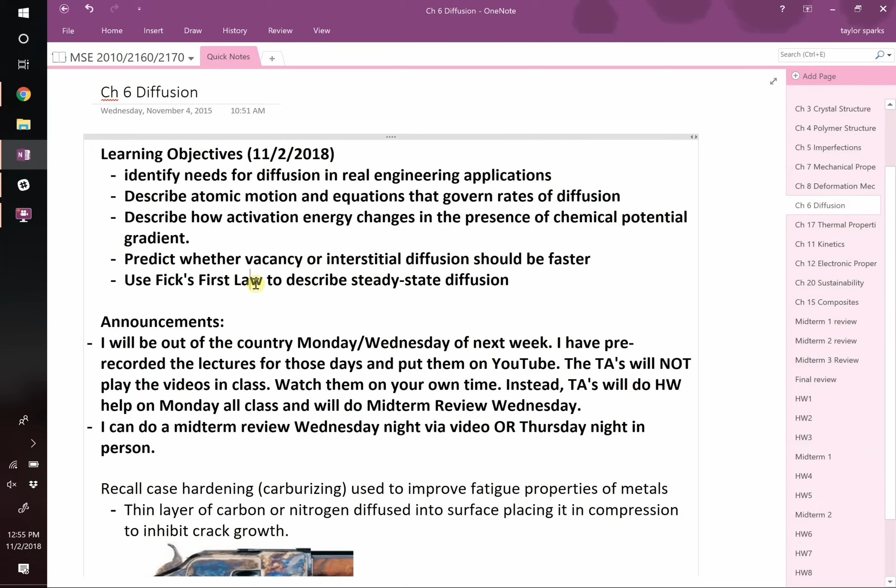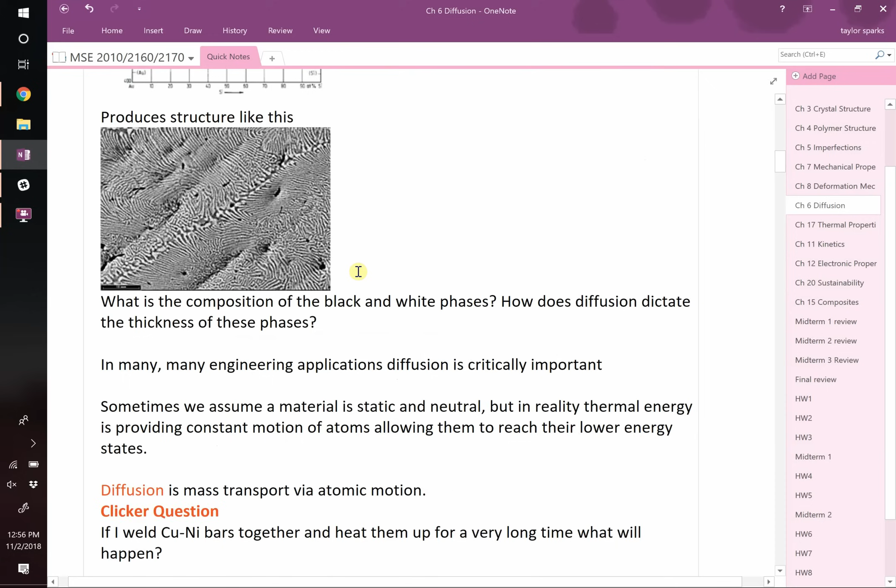Couple things today. We're going to do the first half of chapter 6, but I do have some announcements. I'm going to be out of the country next week on Monday and Wednesday. So I have pre-recorded the lectures for those days. So the latter half of Diffusion, halfway down, I've already recorded it and notes are here. And they're already all messed up because I've added space. So I'm going to finish the lecture today and put it online. And then you can watch the other 2 lectures anytime you'd like.

Instead of having them in class, which we've done in the past, you can come on Monday and Wednesday just for homework help and midterm review. Make sure to bring your homework in on Wednesday, right? You still do have to turn in your homework on Wednesday, but I don't care if you stay the whole class. There won't be clicker questions. Instead, the TAs are just going to do homework help all Monday and midterm review all Wednesday, okay? So watch the videos anytime you like.

That said, I get back Wednesday night, and the test is Friday, which doesn't give me a bunch of time for a midterm review, so we can do one of 2 options. I can do the midterm review Wednesday night, but I won't be able to do it in person. I'll have to just make a video and do my best to go over the topics. That's one option. The other option is I come in on Thursday night and I can actually do face-to-face questions if you have specific ones. I guess a third option would be send me the questions ahead of time that you have, and I'll cover them on the Wednesday night thing. The benefit to the Wednesday night is I'll post it 2 days in advance of the test. Thursday doesn't give you a lot of time because the test is the next day.

So we'll do a quick poll. Would you prefer A or B? A would be an in-person review on Thursday night. B would be a video review of just all the study guide topics, which I'll have posted by Sunday. But that's going to be on Wednesday night, 2 nights before. So go ahead, get your answers in. There's no correct. It's just participation on this.

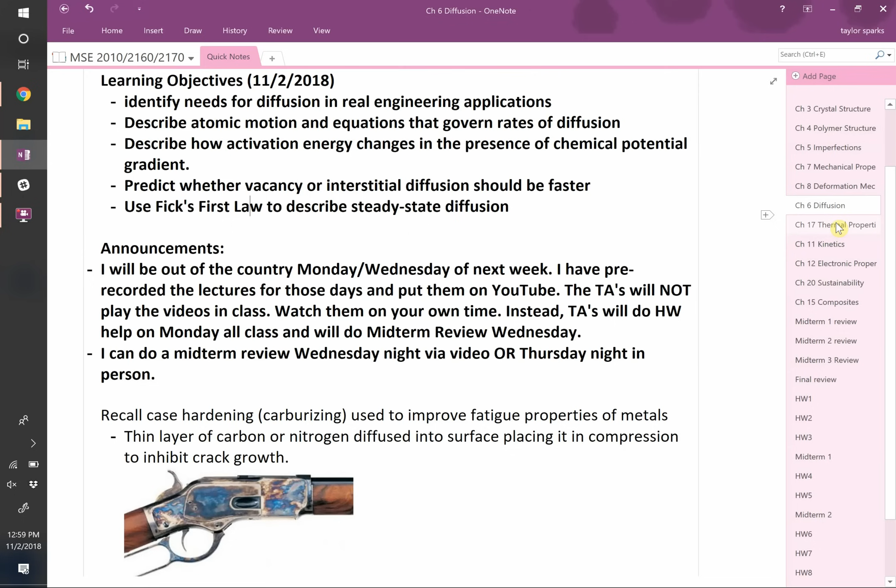And I've said it before, but it bears repeating. Every midterm is built out of a homework question that you've seen. So the best thing to study is previous homeworks, right? Look up the notes from class for sure, but the best thing to study is the previous homework that tags along to that question. Okay. That said, so our learning objectives, we will say a few words about the last chapter that we didn't get to.

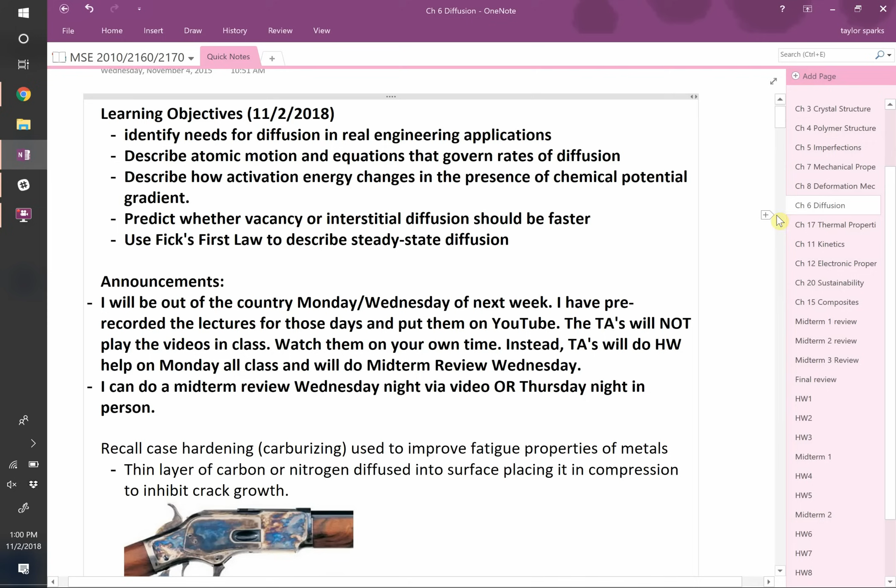And in chapter 6, we're going to start talking about why on earth we care about diffusion. What is diffusion? We're going to describe how atomic motion works and how this governs the rate of atoms moving through a lattice. We're going to introduce the concept of an activation energy and a chemical potential and how that leads as driving forces and inhibitors for motion. And by the end of class, we're going to get to Fick's first law for mass transport.

But before we do chapter 6, let's just do a quick recap of the very last things in chapter 8. The very last thing that we didn't quite have time to get to was stress relaxation in polymers. We showed you it briefly in a previous chapter, but it said that the stress that you apply on a polymer is going to slowly relax, and that's because the polymer chains can slide past one another. So the stress at any given time is right there.

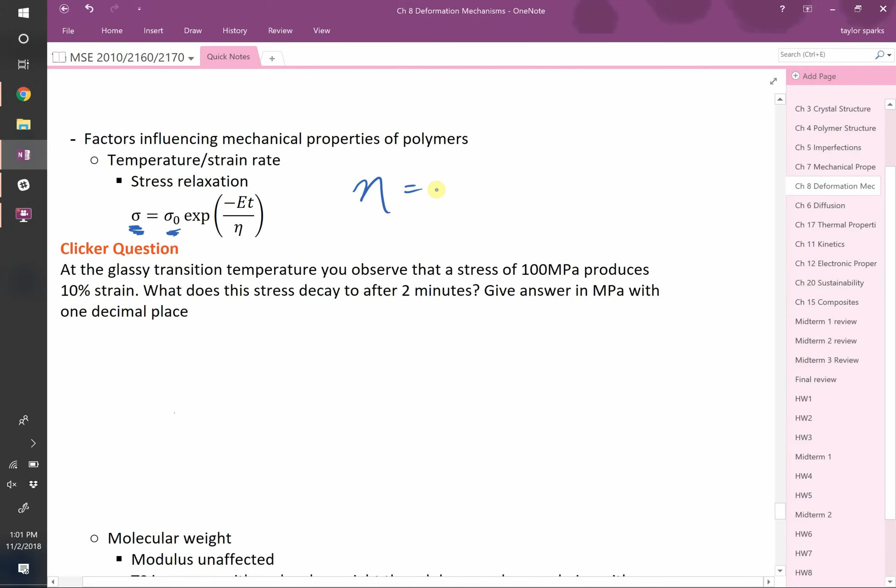That's going to be a function of your initial stress, sigma naught, multiplied by the exponential of negative modulus, that's your stiffness, Young's modulus, times time divided by viscosity. Okay? So I think there's a question on the homework where you had to relate viscosity to the viscosity at the glassy transition temperature, 10 to the 12 Pascal seconds. And we found a way to modify it at different temperatures.

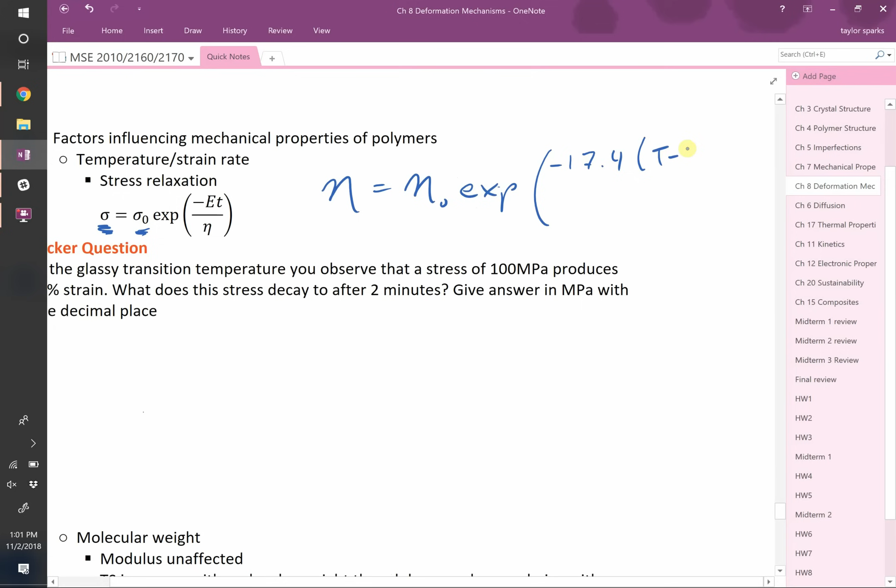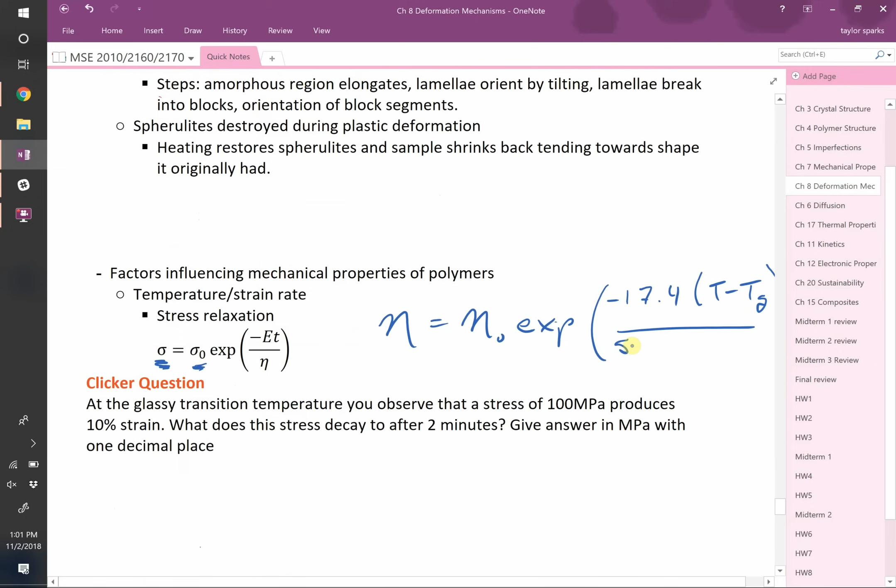And it was something like negative 17.4 times temperature minus the glassy transition temperature. And then the bottom was, I think, 51.6. Right here. 51.6 plus T minus TG. So if you did need to know what the viscosity was at a different temperature, this would be the equation that you could use as a first approximation.

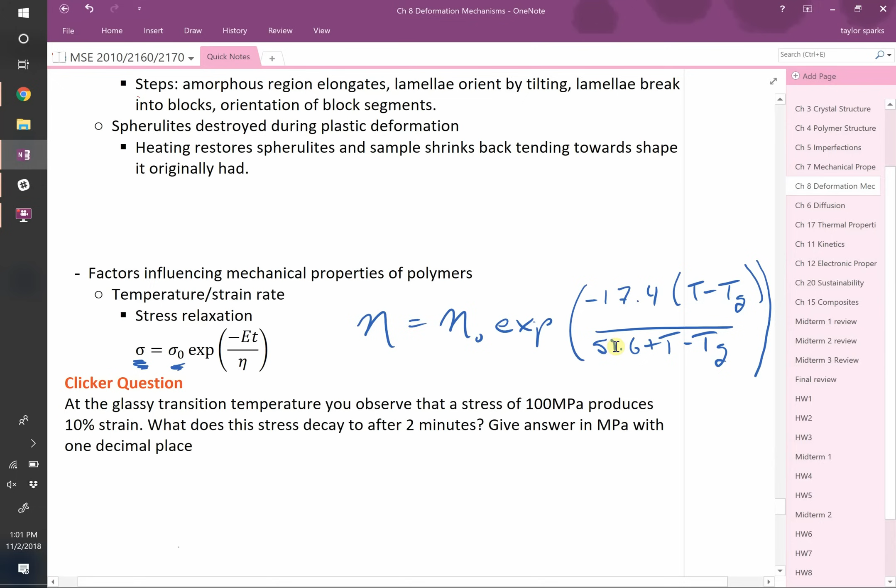The problem with this, what's called the WLF equation for viscosity, is that you need to know what these constants are and they're material dependent. So if you just use 17.4 and 51.6 for all the materials, it's not going to get it right all the time. It's just an approximation. Okay? Let's do a quick calculation though with this.

Let's assume the following. At the glassy transition temperature, you observe a stress of 100 megapascals produces 10% strain. What does this stress decay to after 2 minutes? Give the answer in megapascals with 1 decimal place. And if you don't know where to start or if you want a hand, we've got a couple TAs that can help out. Just raise your hand.

Sorry, scoot past you. Okay, how can I help? We don't have the glassy temperature. Well, you're told that you're at the glassy transition temperature. So that tells you what the viscosity is, right? Oh, it's 10 to the 12. Yeah, 10 to the 12 Pascal seconds. Other questions I can answer? Well, if you notice that viscosity is in Pascal seconds, T has to be in seconds to cancel out. So if you keep your units, you'll get it right eventually, but just put it in seconds.

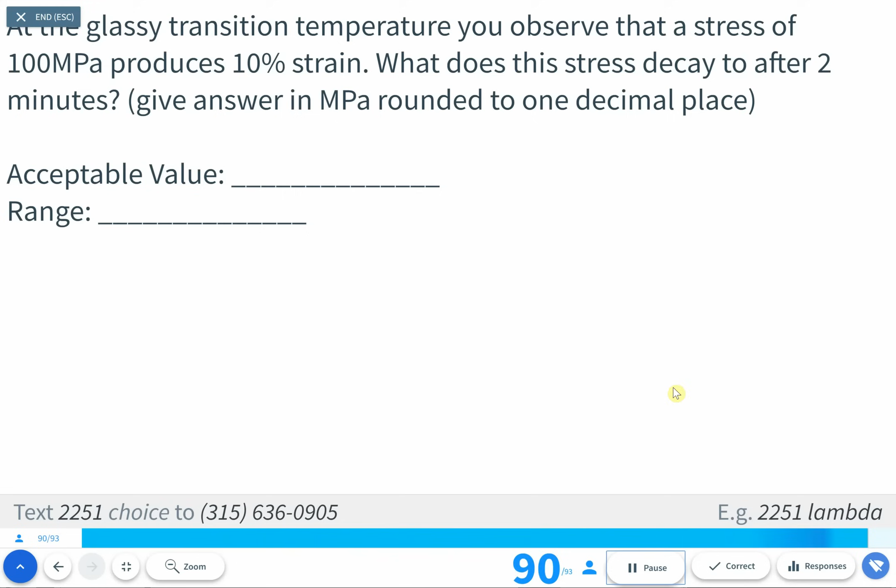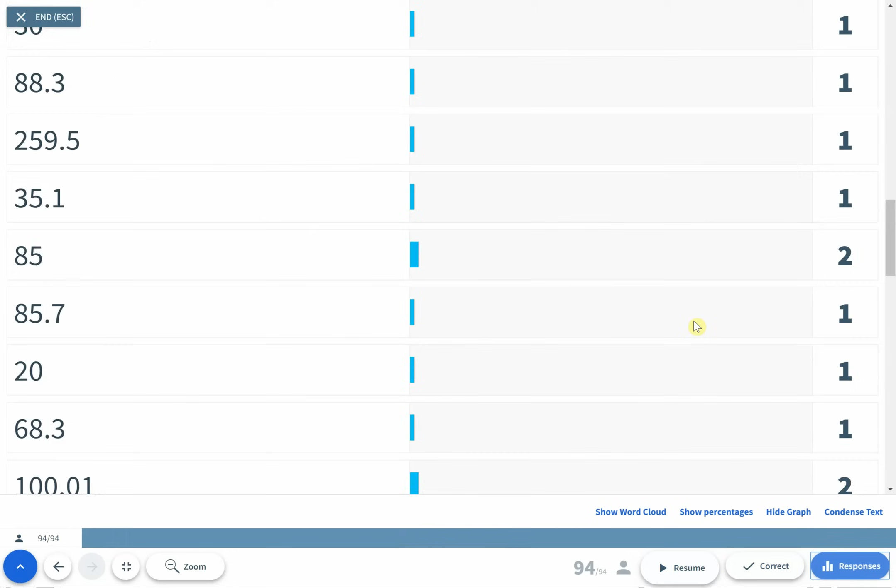So to do this question, we need modulus. So remember Hooke's law to get modulus. If we need to solve for big E, it's just going to be the stress divided by that strain. The stress was given at 10% strain, so turn that into not a percent when you solve for the modulus, right? That is in megapascals, but viscosity is reported in Pascal seconds. So to make our life easier, let's just convert it to pascals right now. So that's going to be 100 times 10 to the 6th pascals.

Multiply that by time, which is 2 minutes. Let's put that in seconds because viscosity is in Pascal seconds. So that's going to be 120 seconds. And divide this by 10 to the 12th Pascal seconds. We stated that this happened at the glassy transition temperature, and by definition, the glassy transition temperature is when the viscosity is 10 to the 12th Pascal seconds. So that's something you want to put on your equation sheet. I didn't bring my calculator. Somebody punch this in for us and see what you get.

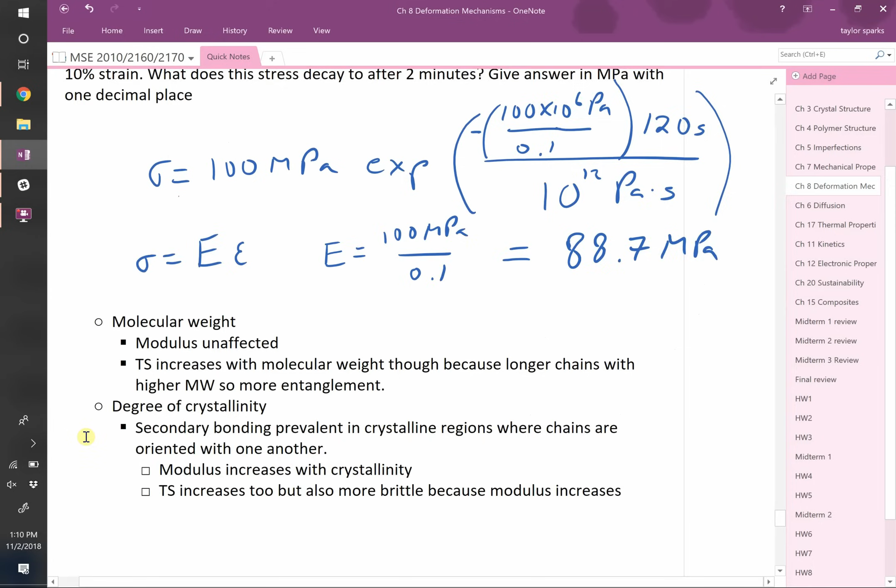All right, let's say a few more things about molecular weight. As you increase the molecular weight, the modulus doesn't change that much, but the tensile strength does change. As you go towards longer and longer molecular weight chains, there's more and more overlap, so the bonding gets stronger, which makes sense why the tensile strength increases.

Degree of crystallinity, let's see, this changes. Secondary bonding is prevalent in crystalline regions where the chains are oriented with one another. So if you have a more crystalline polymer, then you have more fraction that's bonded together, even with van der Waals bonding. So that will increase your modulus, okay? Modulus will increase with crystallinity, and obviously tensile strength will as well. Okay, those are the last things on Chapter 8.

Any last questions on deformation mechanisms, on mechanical properties? Because I think we're going to move on to diffusion now. Yeah, Becca? Oh, thank you. Okay. The units in the exponential cancel out, and the unit in the pre-exponential was megapascals, so it is megapascals. Good thing to ask about, though.

All right, so let's move on to Chapter 6, which is diffusion. Okay? So diffusion is another important engineering process. You can't help but use it. We use it all the time. So this gun up there that has that sort of patina look to it on that casing, that's something called case hardening. They do it intentionally. And all they do is you start out with the steel, and then you expose it to either nitrogen or carbon. And over a while, that nitrogen or carbon will diffuse into the steel.

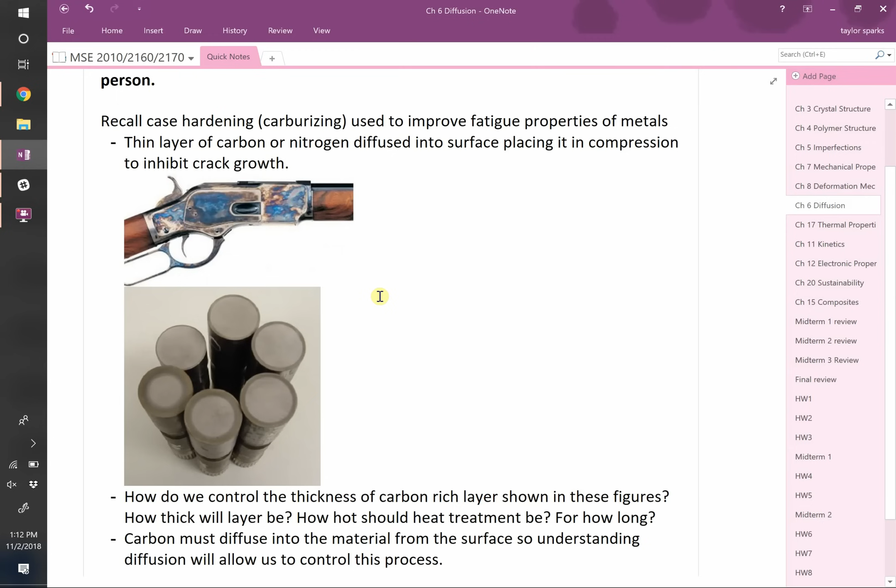And the reason that they do that is by putting carbon and nitrogen into the lattice, you start to fill what are called the interstitial sites. If you remember back to crystal structure, interstitial sites are the ones between the atoms. And so by putting atoms in those spots, you make it harder for slip of dislocations. Therefore, you made it harder. And you made it harder right at the surface, so you made it less prone to be scratched. So it's a way to not only make it look kind of nice, but you prevent scratching when you do case hardening. And they do this in all sorts of stuff.

Take these different materials here. I don't know what exactly these are, but they're adding carbon to the outside. And as they change the conditions of the heat treatment, the carbon is changing how far it can travel into the material, right? You can see that just by the color. You got this thick ring here, but in the other ones it's thinner and thinner. So an understanding of diffusion will help us understand how far into materials diffusion will occur, right?

So we've got a cool demo for this. It's the most dangerous one to date, and I need a volunteer. But like, you have to be really sure. Are you sure, Ashton? Okay, come on down. Okay. Ashton, I hope you don't mind smelling like Dark Temptation Axe. Because you're about to. But for science. He's risking life and limb for science, for all of us to learn. So, I'm going to go ahead and spray him with this Dark Temptation Axe body spray. And when you smell it, I'd like you to raise your hand.

No one smells it? You guys don't smell it yet? Wait for it. It's coming. Oh, gosh. I have to get on a plane later today. I'm going to smell so dark and tempting. Hands up. You smell it? We're like running out of juice over here. Holy crap. How do you not smell that? You're a good sport, Ashton. Okay. This may be the longest I've ever done this demo. Alright, we're going to call it.

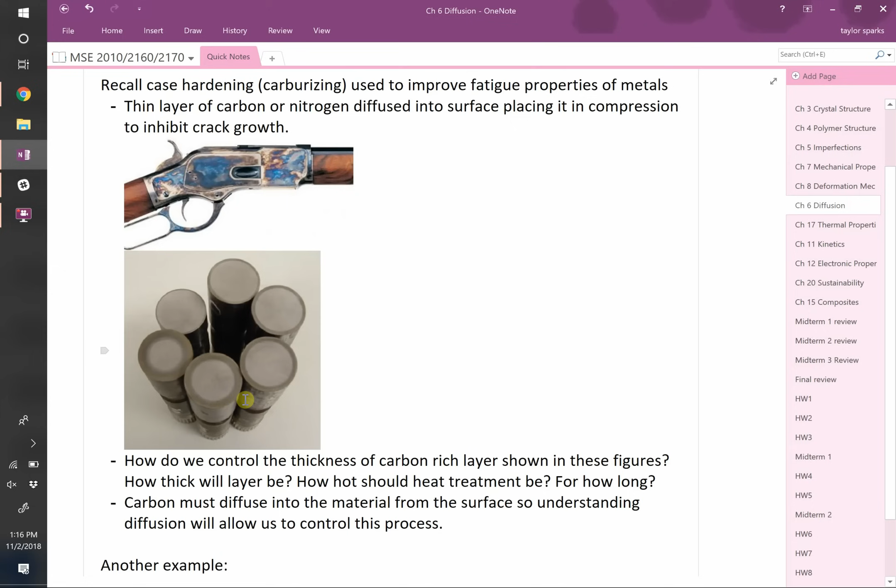It's similar in that if you have a concentrated region of a type of molecule over here, that molecule is going to travel down the concentration gradient. That's why, if you saw the hands in the room, we smelt it really quickly, because we were doused in it. Ashton's really doused in it, right? And it sort of spread its way through the room, okay?

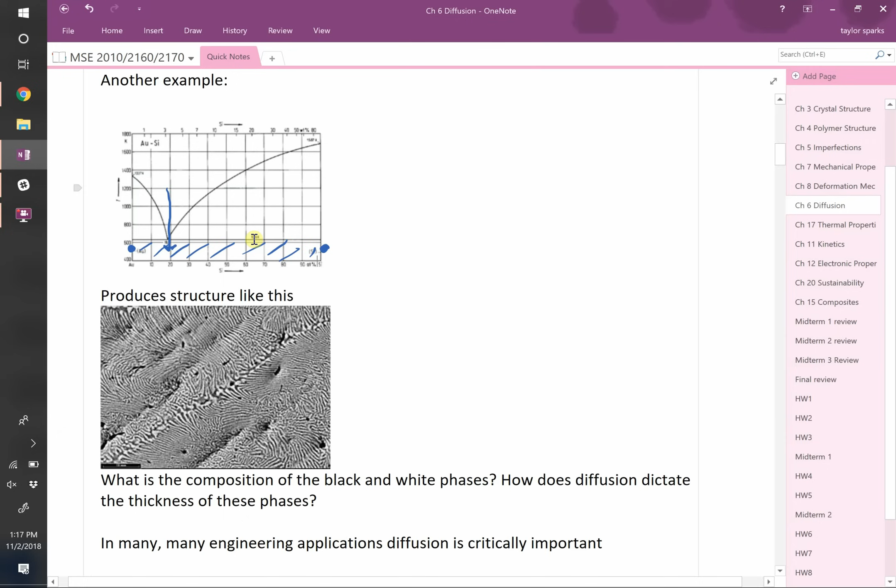And that's why you see these tiger stripes. These represent phase boundaries. These are grain boundaries, right? Grain boundaries cost energy. The system would like to get rid of these, but it just can't do it because diffusion is too slow. Moving all these atoms to get a big black glob and a big white glob would just take more mobility than these atoms have. Okay?

So when we start talking about diffusion, one of the first things we can do is build what's called a diffusion couple, right? A diffusion couple means, let's say I take a copper bar and a nickel bar. So I've got copper and I've got nickel. And I weld them together, I bond them, I press them together. And then I heat treat them. What will happen when I heat treat them, after a very long time? This is our next clicker question, I think.

Okay, if I weld a copper and a nickel bar together, and I heat them up for an infinitely long time, what will happen? A, nothing. B, you get a mixing of the atoms, but you end up with a copper-rich and a nickel-rich region. Or C, a completely homogeneous mixture. And we've already said that things go down the concentration gradient, so it would make sense that there's some mixing, but the real question is B versus C, right? Do you always have a nickel-rich and a copper-rich region, or is it completely mixed? Okay, get your answers in.

Yeah, it's so strong. Easily the longest we've ever done that demo. I need my wife to bring me another shirt for the airplane. Everything okay?

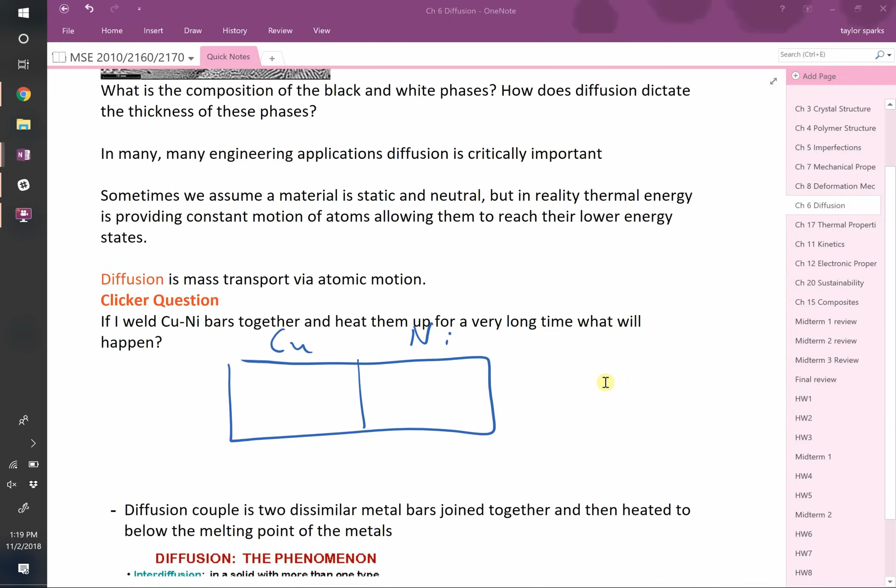What about in times less than infinity? In times less than infinity, you're going to see a concentration profile, right? So if we were to draw the concentration of copper, after a while it might look something like this, whereas the concentration of nickel might look like this. They do not have to be symmetrical. That's an important point. In fact, the only time that they are symmetrical is when the diffusion rate, or what we're going to get to, called the diffusion coefficient, is equal for each species in each host.

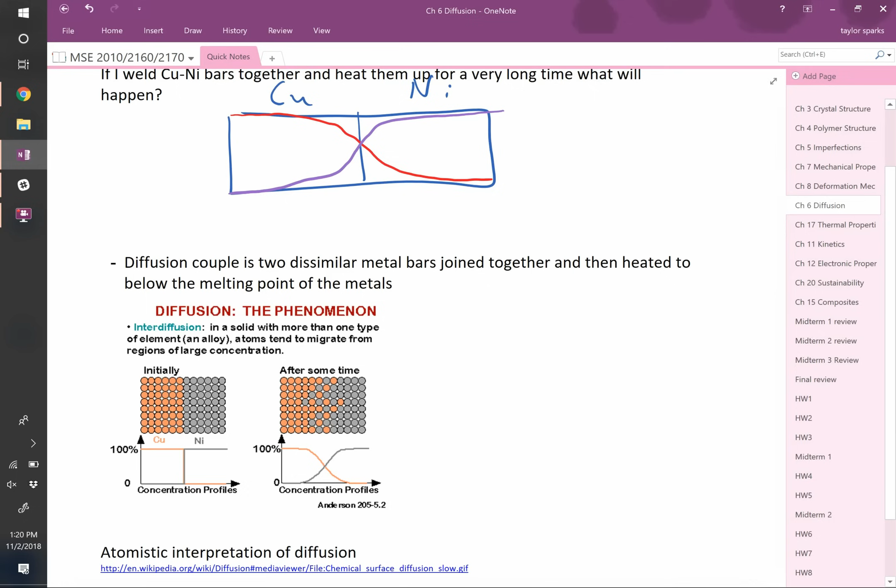So the species is the atom that's diffusing, and the host is the lattice it's diffusing into. If those are the same for copper into nickel as it is for nickel into copper, then you'll get a symmetric profile, but it doesn't have to be that way.

Okay? So here's an interesting way to think about diffusion. Somebody made a nice cartoon for it. There it is. So here they're showing atoms at the interstitial positions of the blue lattice. And then they give these things atomic vibrations, right? And you see that on average, these white atoms are starting to spread out.

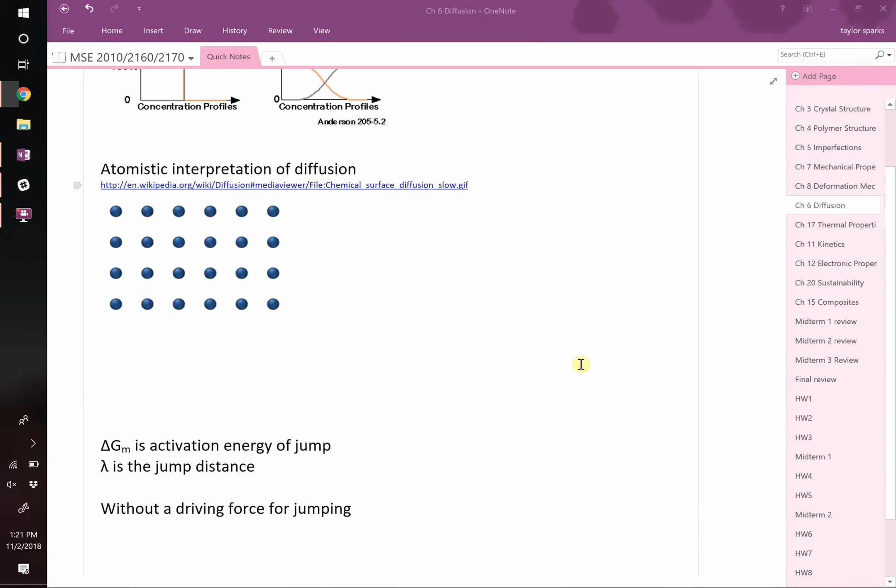There was a whole bunch of empty space on the right-hand side, and they were concentrated on the left-hand side. So it was a higher concentration, lower concentration. And if these things move randomly, they can't move into a spot that's already occupied, so their average flux is going to be to the right. A flux simply means that there's an amount of something moving per area per time. Okay? So that's sort of an atomistic interpretation of diffusion.

We can actually turn that into a nice cartoon, right? So let's go ahead and draw an axis here. We're going to draw energy versus distance in our lattice. So that's in the x direction. We're going to draw energy up here. So when an atom starts out, let's say that we want to hop from one spot to another. Typically when it's in its spot where it started out, that's a spot that's lower energy. And as it hops to another spot, it has to overcome an energy barrier, right?

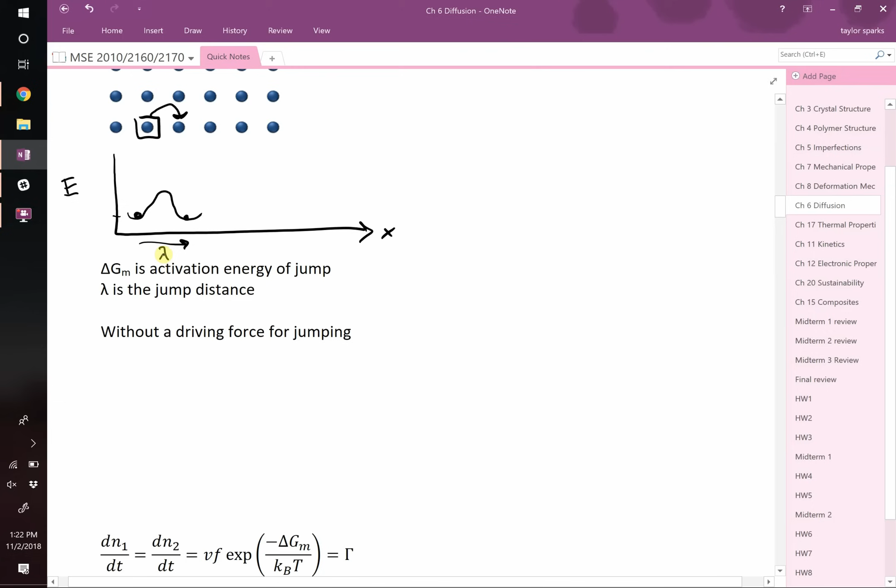So the plot might look something like this. This is where the atom started out at some lower energy. And when it moves a distance over to this point, we're going to call that distance lambda. That's the distance between hopping sites. It typically has to overcome some energy barrier. We're going to call it the activation energy, delta G M. That's an activation energy from going from one site to the other.

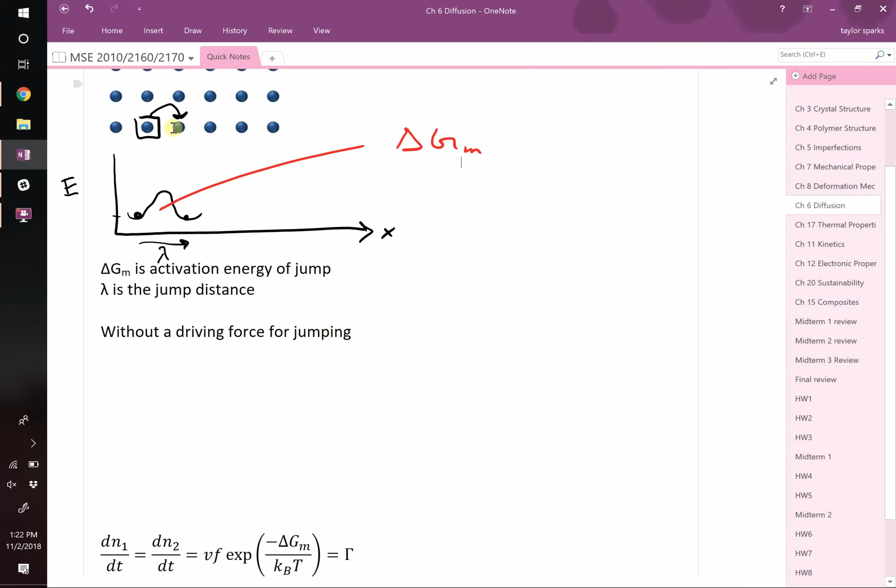And maybe the right way to think of it is that if you're an atom that's going to move over here, you have to break bonds, you have to squeeze other atoms out of the way. So it makes sense that in that transition period, as you're moving to an empty site, it's going to cost a little bit of energy. But once you get there, you're going to gain some energy because you're going to form new bonds. The strained atoms go back to normal. So that's our activation energy for jumping, and that's our jump distance.

Let's modify this now. Let's assume that you can hop in both directions. So we're going to draw our axes. So you've got energy. This goes from site 1 to site 2, and your curve looks like this. Okay? So we could figure out the rate of atoms moving from the left to the right, from 1 to 2. We could also calculate the rate from going 2 to 1.

So we could calculate dN1/dt. N is the concentration, so that's the change in concentration with respect to time on site 1. And we could figure out the change in concentration of site 2 with respect to time. So we have concentration N1 over here, concentration N2 over there. We have our same activation energy as before.

And in this case, with no driving force, the rate of change of atoms from site 1 to site 2 versus site 2 to site 1 is going to be the same. They both overcome the same activation energy. So we're going to say that dN1/dt equals dN2/dt, and that equals nu times f. Nu is the attempt frequency. So if an atom's vibrating, each time it's vibrating, that's an attempt. One of those times it might actually jump over to the other side. F is the fraction of atoms in the correct configuration.

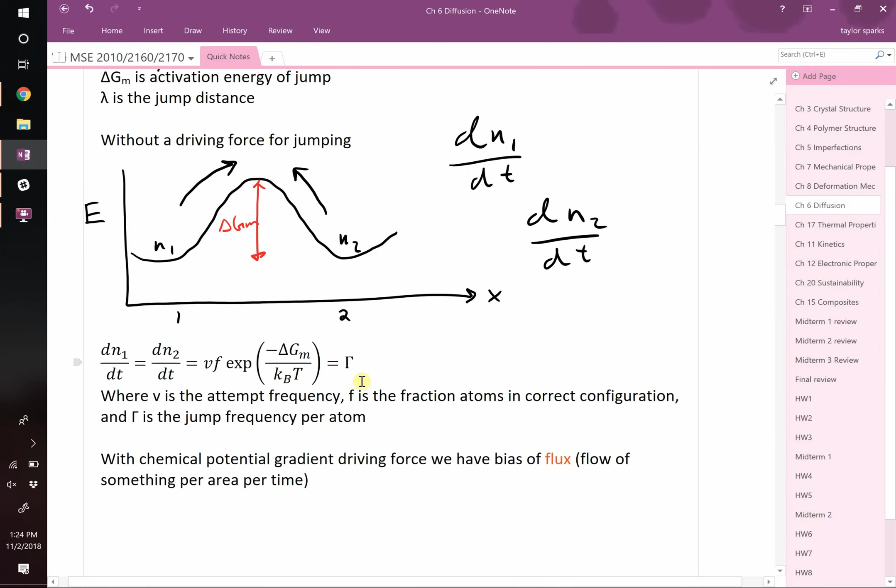What do I mean by that? If we go back to this drawing, for this white atom to keep on hopping that way, there has to be an empty spot next to it. Like, this guy can't jump up because there was an atom above him. So that's not right.

Also, it takes into account what's the direction, because we define the direction from 1 to 2. So only one of its 6 directions it can jump is in the right direction. That makes sense? So it's just a fraction that accounts for geometry. Then you've got an exponential of your activation energy. This is a thermally activated process, so you have thermal energy in the bottom. We're going to call that whole thing gamma.

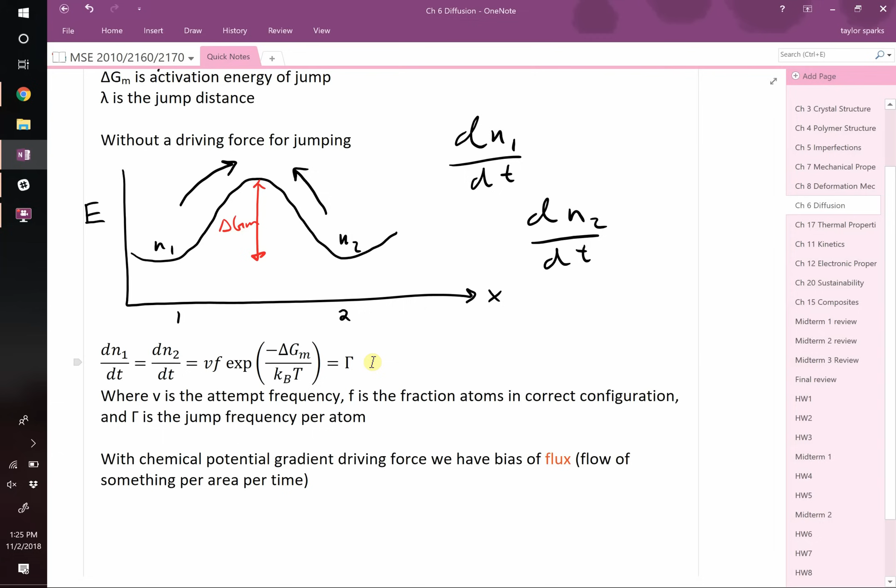Okay? This is just some background for diffusion. We use simpler equations in this chapter, so don't sweat these equations I'm going through right now. This is just background. Okay? We're going to modify this now. We said when there's no diffusion gradient that the rate of atoms hopping from one site to the other is the same as them hopping right back. So there's no net flux. There's no movement through some area per unit time.

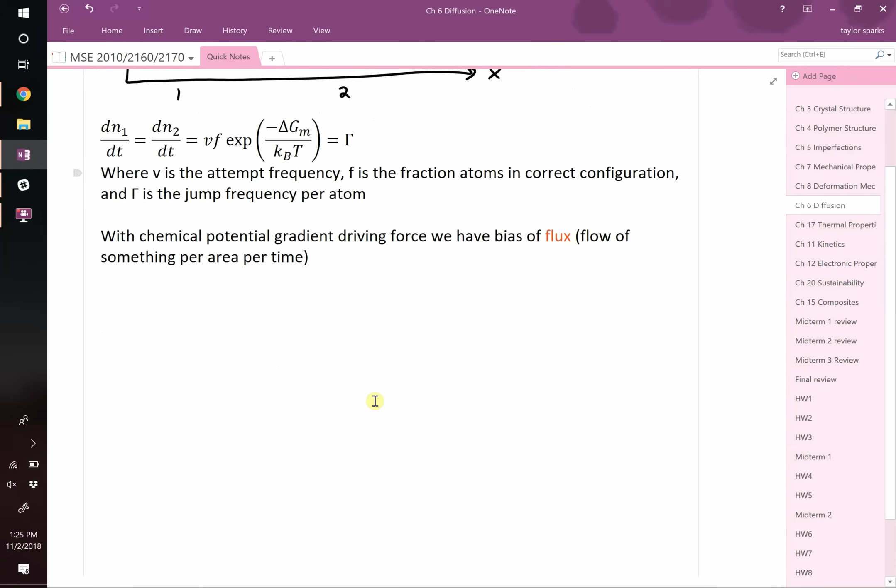But if we apply a gradient in the concentration, or what we call the chemical potential, then we do produce a net flux. Here's how it looks. So we're going to start with our axes just like before. This time going from site 1 to site 2, we're going to apply a gradient in the concentration. So the atoms at site 1 are much more concentrated, right? That makes it look like this. Okay?

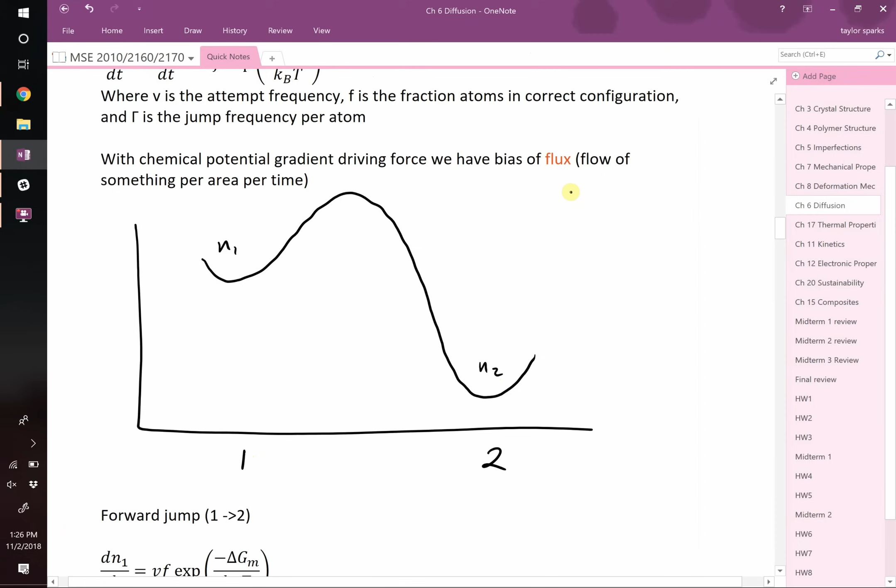So right here, N1, N2. N1 is greater than N2. It's more concentrated. That changes the energy that we're at. It starts out at a higher energy level than N2 does, right? So therefore, we could figure out the rate of atoms moving from 1 to 2, and we could also figure out the rate of atoms going back from 2 to 1. But look at the energy barrier this time. There's like this massive difference.

Atom going from 1 to 2 has our old friend delta GM, the same activation energy from before. But going from 2 to 1 has to overcome that plus this value right here, which we're going to label as, what do I call it in my notes? We call that delta mu, where mu is the chemical potential. So it's the change in the chemical potential. That's equal to lambda, or jump distance, multiplied by the gradient in the chemical potential.

What is the chemical potential? We briefly talked about it in chapter 10. Doesn't matter if you don't understand it well in this class. All it is, it's a measure of how much the energy changes in a system when you add or remove an atom. So that's exactly the metric we want here, because we are removing an atom. So we want to know how much does the energy change on that y-axis every time I pull an atom out, right?

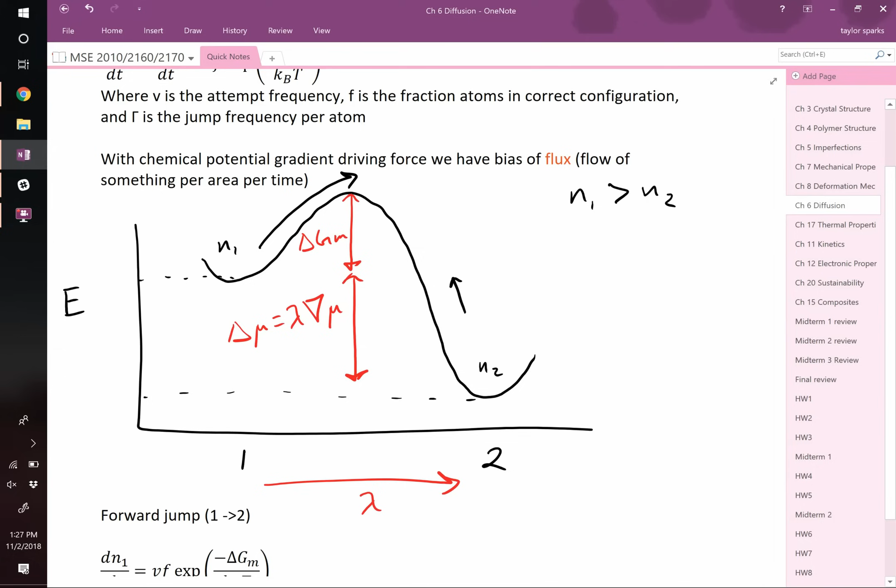So if you have a big difference in chemical potential, which comes from a difference in your concentrations, then you see a really big driving force to go from 1 to 2, but only a small driving force to go back, right? There's a bigger barrier going backwards. Therefore, the forward jump from 1 to 2 is favorable, right? We can calculate what the expression is from 1 to 2. It's the same as before, VF, exponential of our activation energy. But going backwards has this extra term in the activation energy.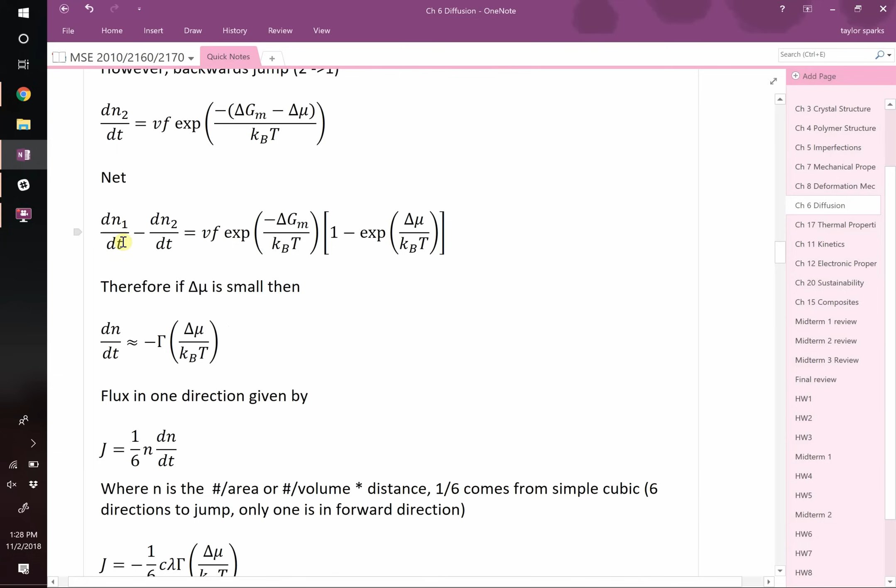And since that's in an exponential, it makes it very hard for it to jump uphill, up the concentration gradient. Nevertheless, we could subtract the two to figure out our net transport, and you get a more complicated expression. If the change in chemical potential is small, that simplifies to this value: gamma times our change in our chemical potential divided by thermal energy. So finally, we can introduce flux now.

Flux is important. Flux is number or amount of atoms per area per time. So for example, if you're trying to measure the flux of water in a river, you could take a square meter of that river, and if you could calculate how many molecules of water go through it per area per time, that would be the flux of your river, right? So that's different than the total amount of water in the river. This is measuring, in some cross-sectional area, what's the flow of matter going through that area.

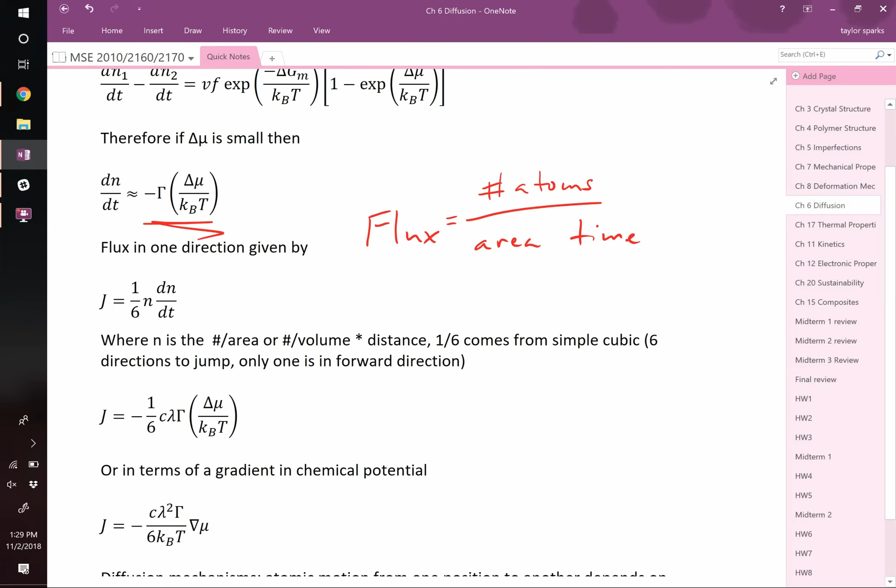So in physics, you probably learned about flux with electrical current density, right? The current density is the flux of electrons traveling through something per unit area, per unit time. Or maybe magnetic field. You would have seen this in physics at some point. Okay? So J is our flux. J is usually the variable for a flux.

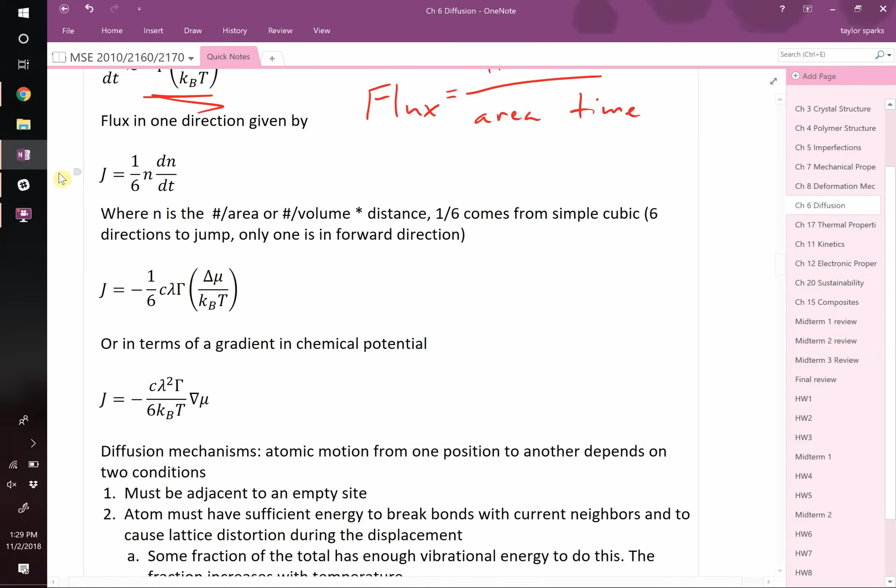It's going to be equal to 1/6. 1/6 comes from the geometry: if we're talking about movement in that direction, of the 6 ways that I can go, up, down, forward, backwards, left, or right, only one of those 6 moves me in the direction that I've defined, right? So that's the 1/6. You've got C times lambda times gamma. Gamma we defined up here.

Lambda is the jump distance. C, I'm forgetting offhand what that is. And then you've got your difference in chemical potential divided by thermal energy, right? So technically speaking, you can come up with a first principle, meaning all based off of atomic interactions, what should be the flux of atomic motion. We're not going to use that in this class. If you take another transport class later on in your college career, which most of you will, you'll see more of that. In this class, we're going to keep it simple, and we're going to do a proxy for this.

This expression, which has flux equal to a bunch of stuff multiplied by the difference in your chemical potential, can really be thought of as the following. This right here, that guy is your driving force. Whereas the other part right here, this is a constant of proportionality. And then on the left-hand side, you've got your flux.

In other words, every time in science, if you ever see a flux, it is always defined the same way. Flux is always equal to a driving force multiplied by some constant of proportionality. Whether that's electrical current density, which we'll talk about later in this class, or mass or heat, there's always a driving force. In this case, the driving force is the concentration gradient. So high concentration, low concentration, that's our driving force. There's a bunch of stuff that's going to turn into a constant of proportionality, and then you got your flux.

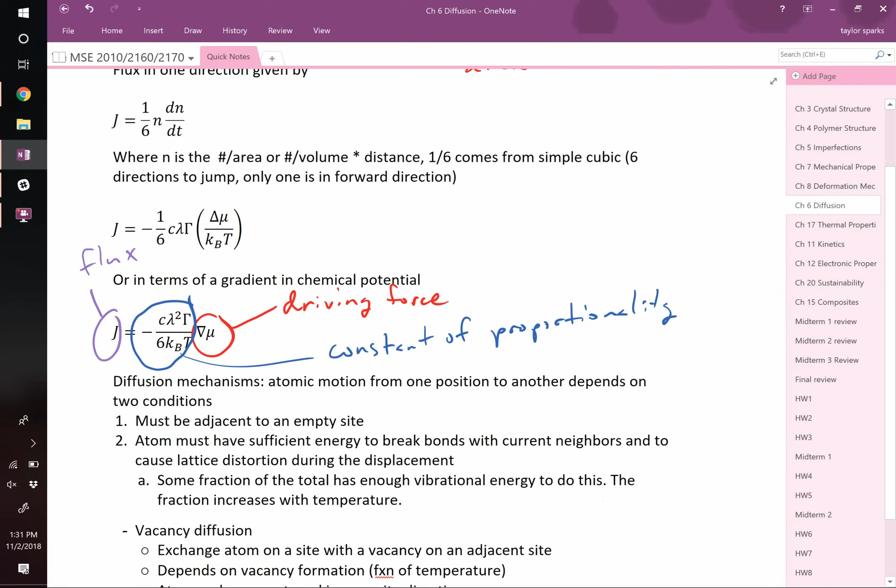Okay? So there's different mechanisms that things can happen to get motion. Different diffusion mechanisms. So atomic motion depends on a couple of conditions. First off, the adjacent site, if I'm talking about flux from one side to the other, the adjacent seat needs to be empty. So for Hector to move from this seat to that seat, this seat needs to be empty. That condition needs to be met, right? What else? The atom has to have sufficient energy to break the bonds with its current neighbors, to distort the lattice as it moves, right? That's all the activation energy.

So if you're at a low temperature, right? Imagine that he was bonded to other atoms here, right? If he wants to move to there, he has to first break the bonds that he's already with, and then he has to squeeze past the lattice and sit down again, right? So that activation energy, if you don't have that thermal energy to overcome that activation energy, then you're not going to be able to diffuse. That's why temperature is such a big deal with diffusion. If you add thermal energy, you can overcome that activation energy, okay?

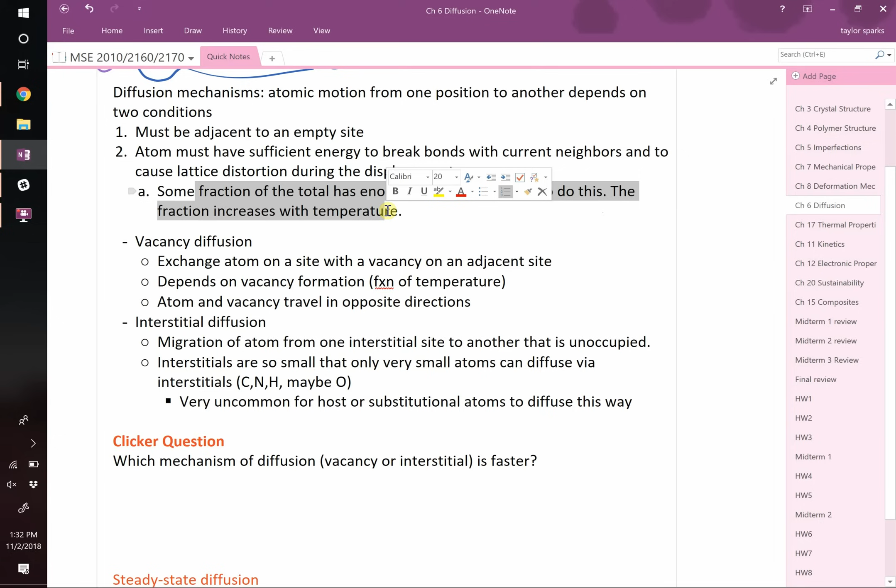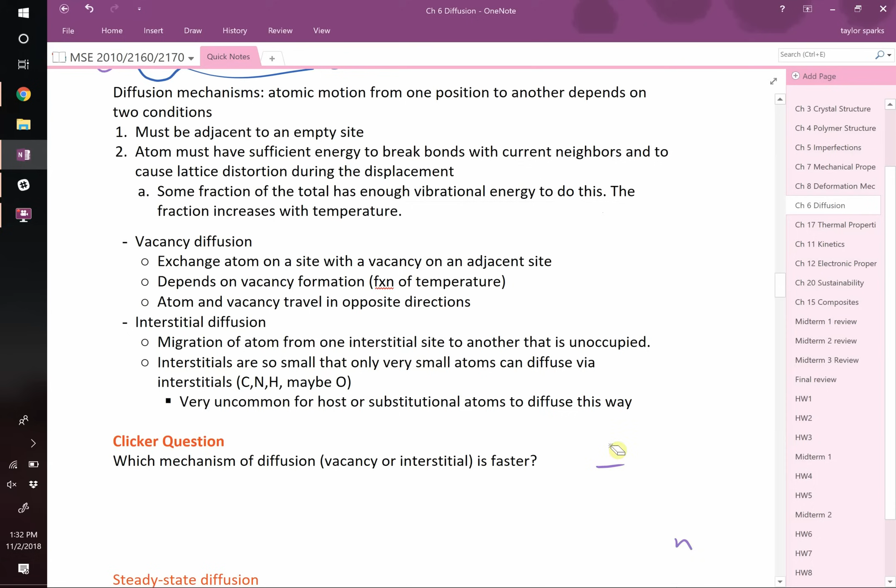Now, when we say thermal energy, it's wrong to think that all the atoms are vibrating at the same frequency. Not the same frequency, but the same amplitude. There's an average amplitude that they're vibrating at. There's an average energy, but there's always outliers. It's always a distribution, just like we saw with Weibull statistics. When you look at energy of atoms versus number of atoms, it's always going to be something like this, right? So there's an average energy that they're vibrating at. I drew that the wrong way. That's the wrong axis, but still. Some of them will have high enough energy to diffuse, even at low temperatures. But the higher the temperature you take it, a higher fraction of your atoms will be able to diffuse because they're over that activation energy.

Okay? All right, there's two mechanisms for diffusion. There's vacancy diffusion and interstitial diffusion. Vacancy diffusion relies on hopping from lattice sites that are empty. So in this example here, if these guys at the far end of this row want to diffuse that way, this vacancy diffuses that way. Students move this way, the vacancy moves that way, right? Avery would sit here, the vacancy moved over. I forgot your name. Ryan would sit in the vacancy, it moved over again, and so on down the line to Connor and to, I forgot your name. Matt, right? So atomic motion and vacancy motion are in opposite directions in the vacancy mechanism.

But there's another way to do it, right? What if instead of hopping from seat to seat, what if it's a really small atom? Then I could go down this aisle between students, right? If it's a small atom like a carbon or a nitrogen or a hydrogen, right? These things can leave the atoms present. They don't have to take their seats. They can sort of squeeze past them. This only works for small atoms. It doesn't work for big ones, okay? So the question is, which one's faster, right? This is our next clicker question, I think. Which mechanism will be faster, vacancy diffusion or interstitial diffusion?

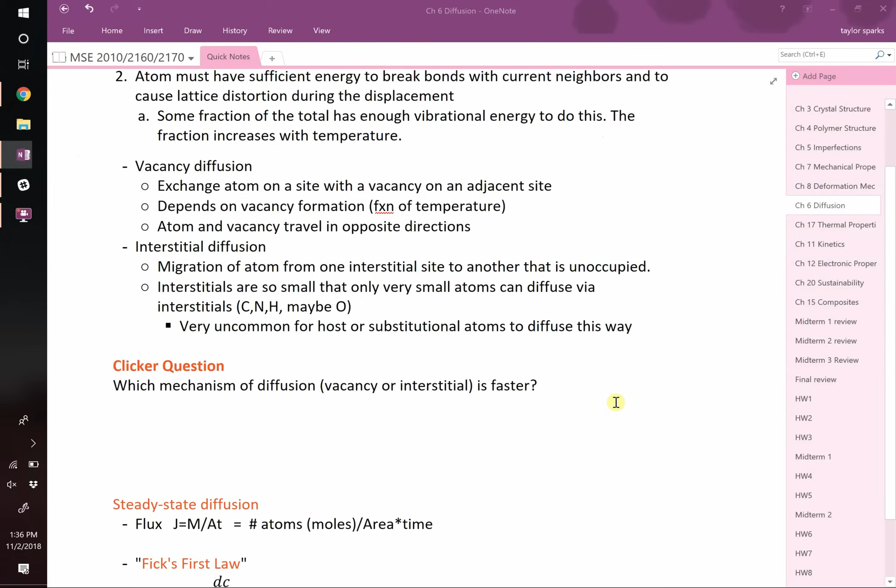Okay, this brings us to the final big topic we're going to talk about today: Fick's first law. So when we talk about diffusion, ultimately we're engineers. What we really want is for you to be able to tell me, for a given temperature and time, how far are things going to diffuse into my material? Or maybe how much flux, how much movement of atoms per area per time am I going to see through my material, right? And to do that, we need two different scenarios. One is Fick's first law, and then there's Fick's second law.

Fick's first law has to do with what's called steady state diffusion. Steady state diffusion means that the rate of diffusion is not changing with respect to time. Okay? The rate, or better said, the rate of flux is constant. So in other words, if there's a river that's flowing and the flow of water in that river is constant, then the flux per unit area per unit time isn't changing. We could use steady state conditions there, right?

But what about during a rainstorm? In a rainstorm, like a flash flood, the flow of that river is changing pretty rapidly with respect to time. So we can't use an expression that doesn't have time in it because we have to account for that change with respect to time. So the easier one is steady state because it's time independent. The rate of diffusion's not changing, right? And in that case, we have the following law.

J, our flux of atoms, is equal to negative D, the diffusion coefficient, multiplied by dC/dx. dC, that's the change in the concentration over dx, right? So it's your gradient in your concentration multiplied by the diffusion coefficient, okay? And let's go ahead and figure out what should the units be of this, right?

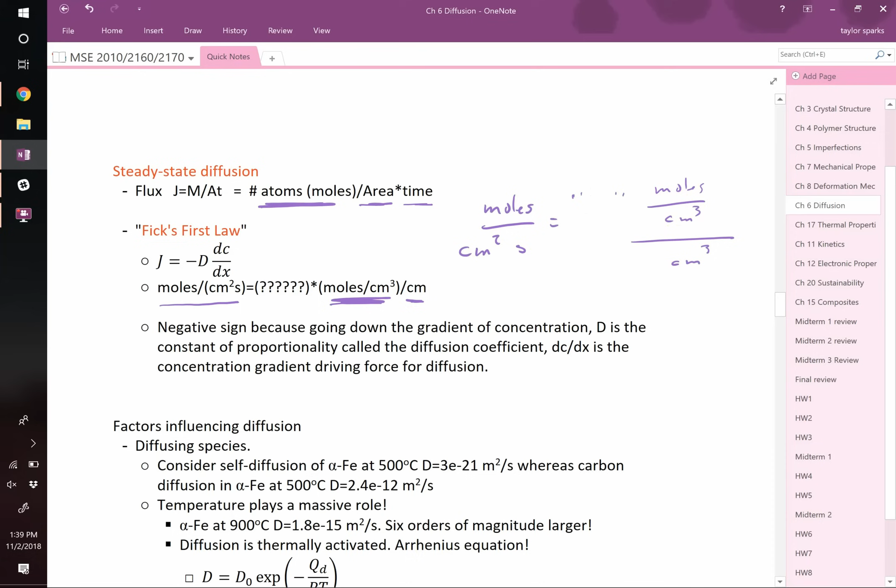Okay, what should the units be? It's at the bottom of the screen. Oh, sorry. That's wrong. Centimeters. dc dx, right? Concentration is the amount per volume. So that's concentration, dc. And then x is just a length. So what should be the units of our diffusion coefficient?

All right, Connor, you're explaining it correctly. You want to explain it to everybody? Sure. So it's centimeters squared over seconds, because that centimeter goes up and makes centimeters to the power of 4. Yep. A squared centimeters on top, make that go squared, and a seconds on bottom.

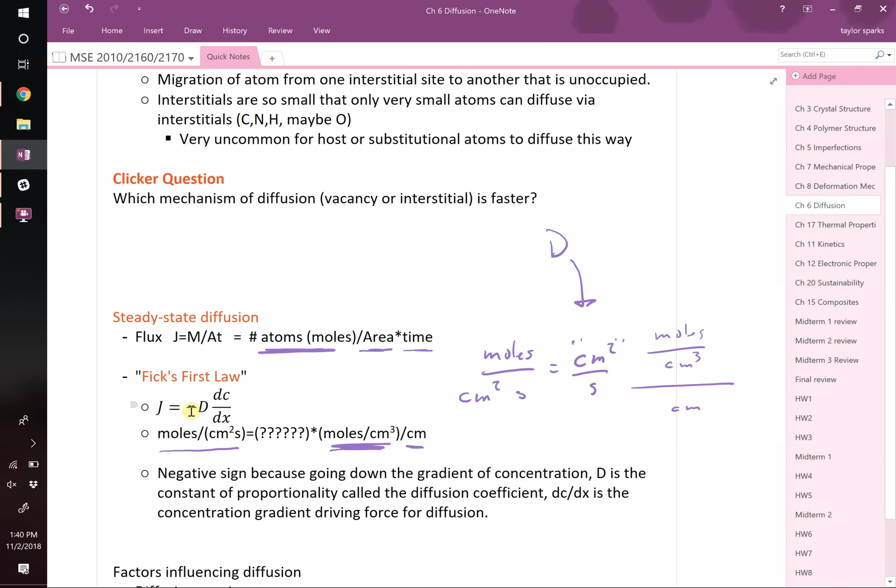Yep, that's exactly right. Centimeter cubed divided by centimeter goes to centimeter to the fourth. So if we want centimeter squared over here, you have to have a centimeter squared up in the numerator and then a per second. So that's going to be the units of our diffusion coefficient. Now, we define this with a negative sign because in mass transport, as in thermal transport, things go down the concentration gradient. That's where the negative sign comes from. So we're moving down the concentration gradient, okay?

The last thing I'll talk about is some factors that influence diffusion and how to plot it. So the diffusion coefficient can be calculated for any species at any temperature by this expression. D, the diffusion coefficient for some species at some temperature, is equal to a pre-exponential, D naught, multiplied by the exponential of negative QD, the activation energy for diffusion, divided by RT. If you're dividing it by RT, that means that you're working with moles of atoms, right?

So the energy would need to be energy per mole of diffusing species. It's just as common to talk about it on a per atom basis. If it's per atom, then that needs to be kBT, Boltzmann constant times temperature, right? Those things are related just by the number of moles, okay?

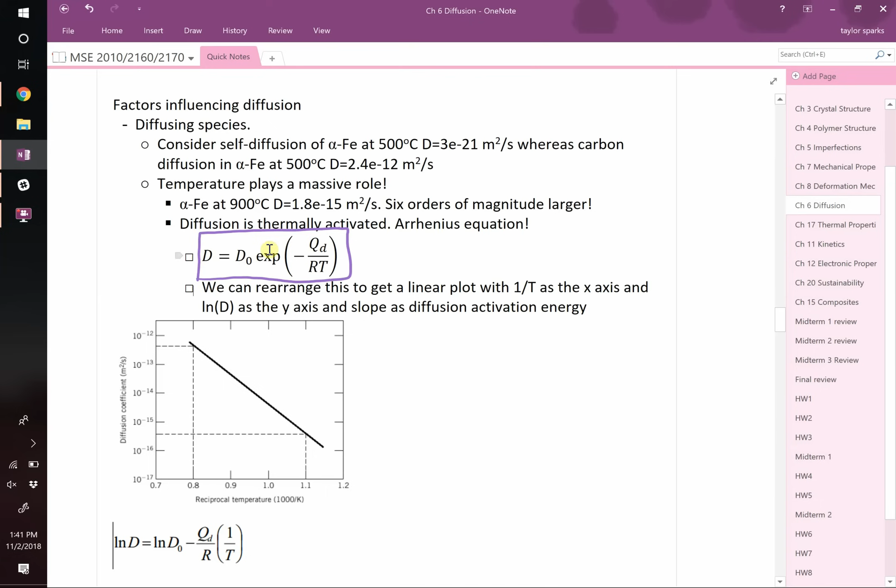Because of that, you could actually take natural log of both sides of this, and you could make it look linear. We've seen this like a million times this semester. So if you thought, oh, I don't have to learn it because it'll just be this one time, it just keeps coming back. You can make one of these Arrhenius equations look linear if you plot it in the right way.

If you plot the diffusion coefficient with a log plot, or take natural log of the actual values, and you put that against 1 over temperature, 1 over temperature is your x value, this is all y, your slope will be your activation energy divided by R, right? So if I gave you this plot on a test or on a homework, I could say, what's the activation energy for diffusion? It's pretty straightforward. You say, well, that's the slope.

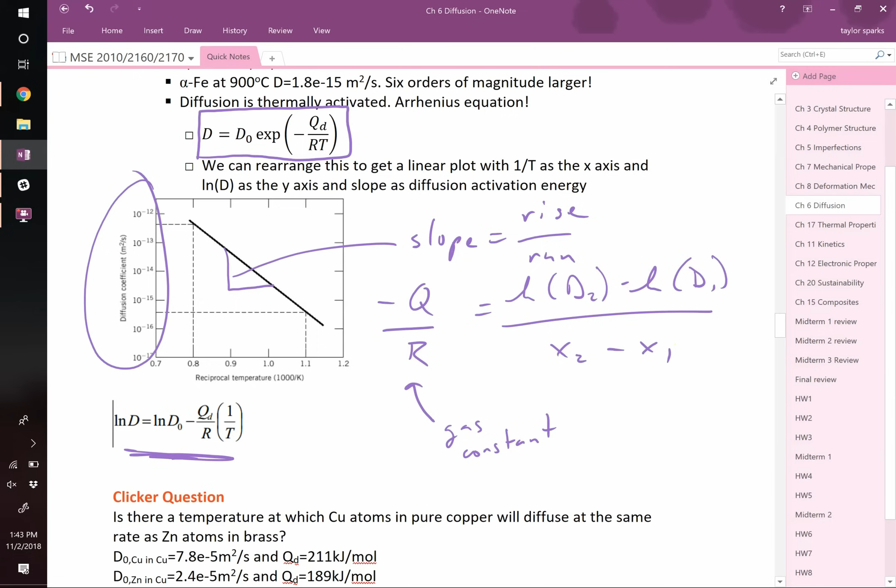And I know that the slope is equal to the rise over the run. What I'm talking about is natural log of D2 minus the natural log of D1 over x2 minus x1. That will equal negative Q over R. R is just the gas constant. So you can solve for Q. Okay? So giving you a plot like that would be fair game on a midterm or on a homework.

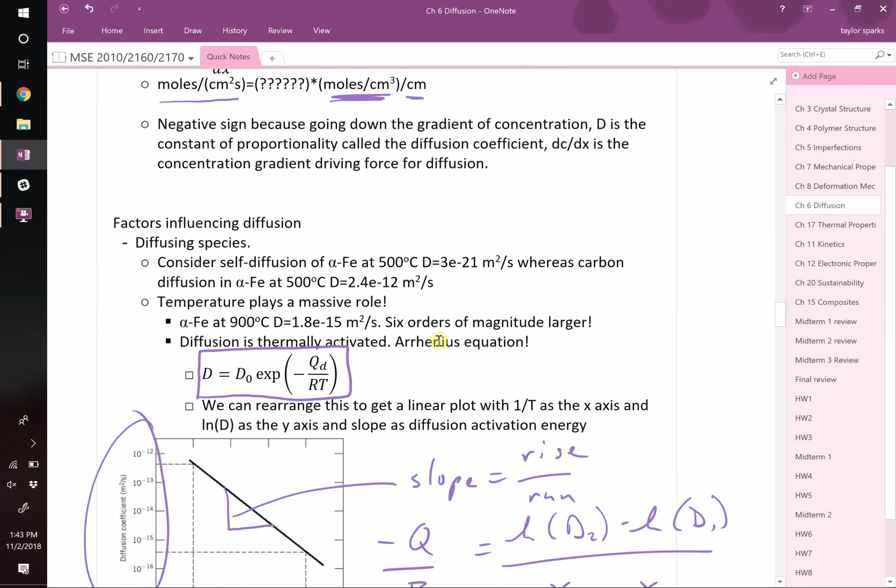What's great about this is that for anything you can figure out the diffusion coefficient, because every different setup, some diffusing species and some host lattice, will have a different D naught and a different activation energy. So if I give you the activation energy and the D naught value, you can tell me the diffusion coefficient at any temperature just by plugging in T.

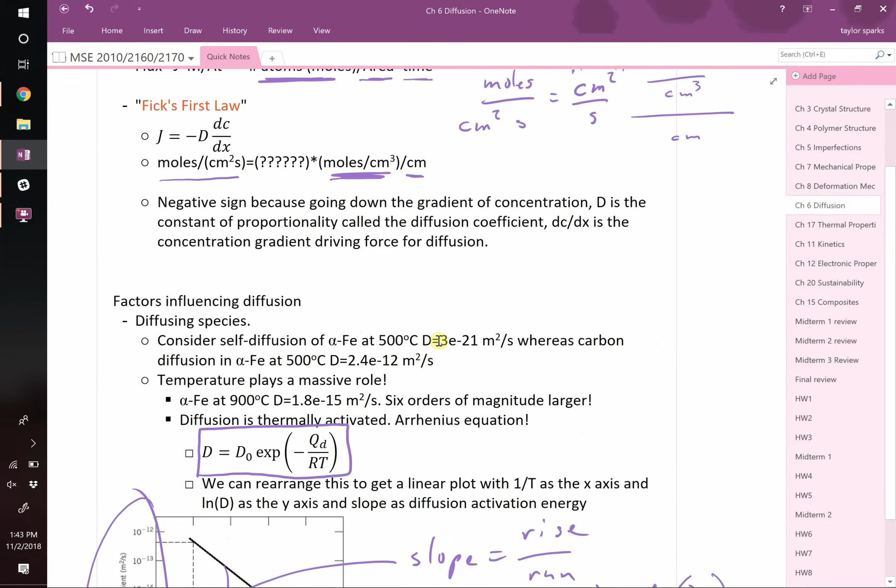So the last thing, which we won't have time to do today, but you could imagine copper diffusing in copper, or zinc diffusing in copper. If I gave you the D naught values and the Q values for those, I could ask you to tell me the temperature at which they would be the same.

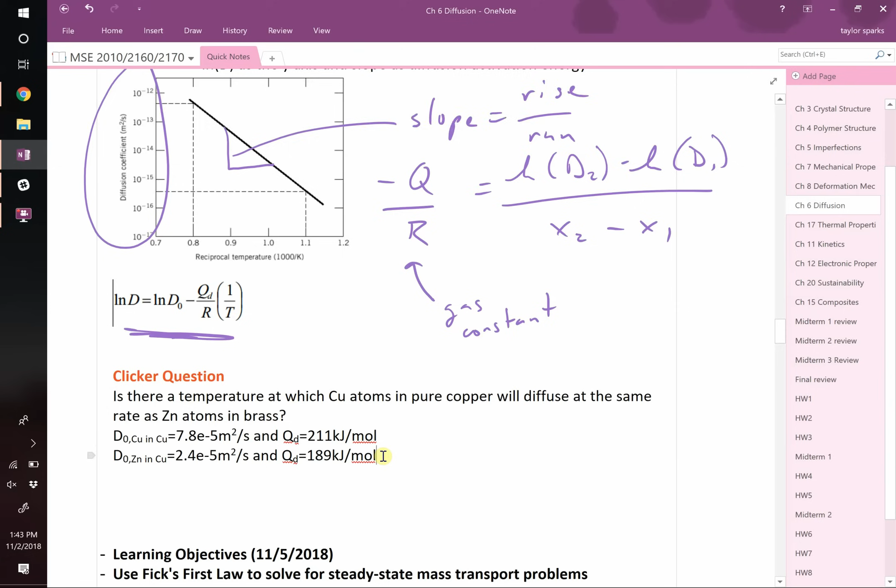To solve that, you would do D naught for copper in copper multiplied by the exponential of negative activation energy for copper in copper over RT, and set that equal to D naught for zinc in copper multiplied by the exponential of negative QD for zinc all over RT. And you'd ask yourself, is there one temperature that satisfies this equation? If so, then there's a temperature when these things diffuse at the same rate.